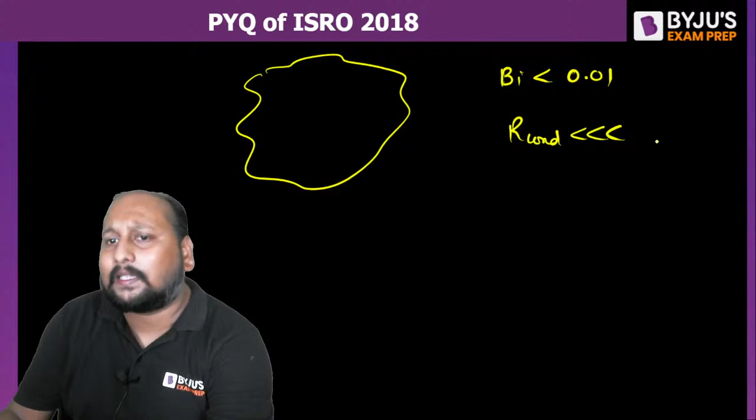If the body has a Biot number less than 0.01, that means the conductive resistance is very, very less, right? That simply means the temperature gradient on the surface is negligible. This is exactly the Biot number, this is exactly the concept of lumped body, right?

Okay fine, and because in Biot number the denominator is the conductive ratio, it has to be less. Either convective is very high or conductive is very less. That is the reason the Biot number has a very small value.

Option C will not be correct. Look, if conductive ratio is less, the Biot number will be increasing. What is the question? The value of Biot number is very small - what is the reason for that? What is the reason that Biot number is very small? Option B is the correct answer.

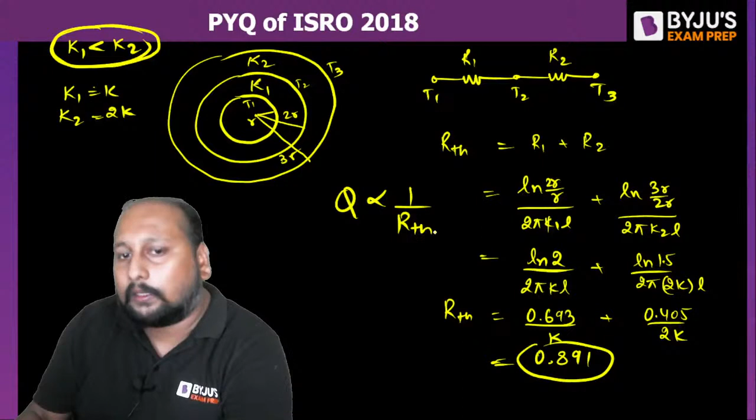In the first case, RTH is more, and we know that the heat transfer is inversely proportional to the resistance. It's a steam pipe, we always need to reduce the rate of heat transfer. So जिसका thermal resistance ज़्यादा होगा, that's the best configuration. That means I need to keep the inner side lower thermal conductivity and outer side higher thermal conductivity. In the examination, you won't be doing this activity; ये only for you guys to understand this logic. In order to increase the resistance, we always keep the material having lower thermal conductivity on the inner side and higher thermal conductivity on the outer side. Is this clear?

Fine. Next question, very easy question. The critical radius of insulation for a spherical shell. Remember, spherical shell, they are talking about the critical radius.

Critical radius, that too I'm talking about sphere. What is the formulation? 2 into thermal conductivity of the insulating material divided by the heat transfer coefficient of the outer surface. भाई 2K by H होता है. The critical radius for sphere is 2K by H.

Cylinder के लिए क्या होता है? For wire we are having K by H. So option B is the correct answer. इसमें तो hardly 1 second will be taking. ये सब जो question है ESE में आ चुका है, GATE में आ चुका है. These questions are being repeatedly asked. So as it is, same question is being asked.

Okay, 2K by H. If I say K by H, this formulation is for wire or cylinder, right? ये सिलेंडर के लिए होता है. फाइन, चलिए बहुत बढ़िया. नेक्स्ट क्वेश्चन.

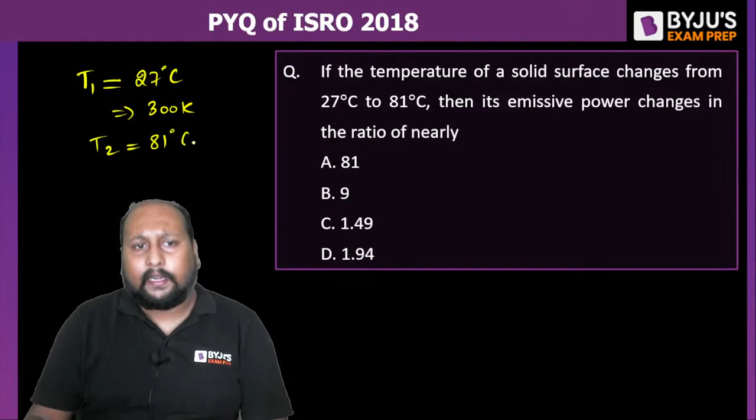If the temperature of the solid surface changes from 27 to 81 degrees Celsius, then its emissive power changes in the ratio of nearly 81, 1.49, 1.94. Simple question hai, quickly tell me what's the answer. Let's say T1 is equal to 27 degrees Celsius, that is 300 Kelvin. T2 is equal to 81 degrees Celsius plus 273, we will be having 354 Kelvin.

We know that the emissive power is directly proportional to T to the power 4. So E2 by E1 is equal to T2 by T1 to the power 4, right? So this is 354 by 300 to the power 4. 1 point something, ये नहीं हो सकता, 1.9 something होना चाहिए, और 1.5. Please check what is the answer we're getting. By calculation करना है, that's it. Are we getting 1.94 or 1.49?

Option D, very good. It will be approximately 1.936, इस range में आएगा. So we can say 1.94 is the correct answer. हाँ, चलो 1398. Okay, 8 है. Fine, 1.94. These type of questions, it's like 10 seconds. थोड़ा calculation है, 10 second बोल लेते हैं. Theoretical question hardly 5 seconds.

So there will be many questions which will be time taking. ठीक है, तो कुछ question ऐसे भी होंगे where you can save the time. So always remember, it's all about time management. भाई पेपर 1 घंटे का है, अच्छे खासे क्वेश्चन करने पड़ेंगे. Do not try to give more than 2 minutes to a single problem. इससे ज्यादा नहीं देना, चाहे कितना भी आसान हो या डिफिकल्ट हो. Okay. हाँ, definitely. Yes.

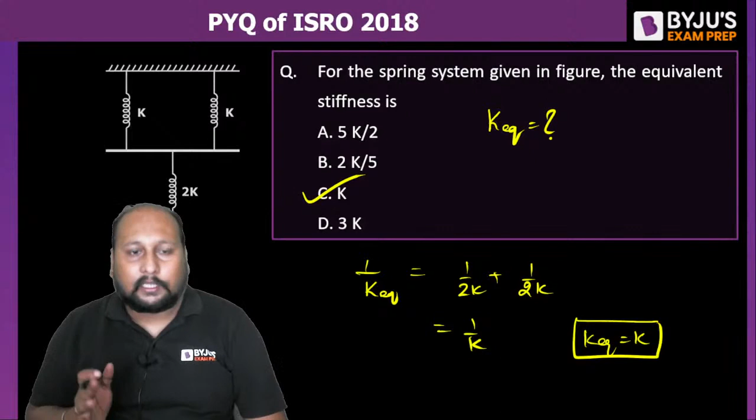इसमें तो no need to do any calculation. अच्छा, you're not able to see the diagram. देखो ऊपर 2k parallel में and series with the 2k. ठीक है, option C. Very good, Surya. Next question on the screen.

For a mechanics subject, there are two blocks A and B of 1 kg each kept on a flat surface, one above another. The coefficient of friction between the contacting pairs is 0.2. That means mu for all the surfaces is 0.2. If the lower block is pulled with a horizontal force F, the minimum value of F for which slip occurs between the blocks is nearly?

You have to tell me the minimum force I need to apply on block B such that there will be slipping between A and B. Quickly, 5.9, 4.9, draw the free body diagram. Individual blocks के लिए draw the FBD and do the analysis. I think that will be easy for you guys to understand. चलो चलो जल्दी से.

If I talk about the free body diagram of block B, we are having a force F, right? There's friction on surface 1, F1, and on surface 2, F2. We'll be having normal reaction N2, normal reaction N1, and weight WB, right? Okay, fine. So now for static condition,

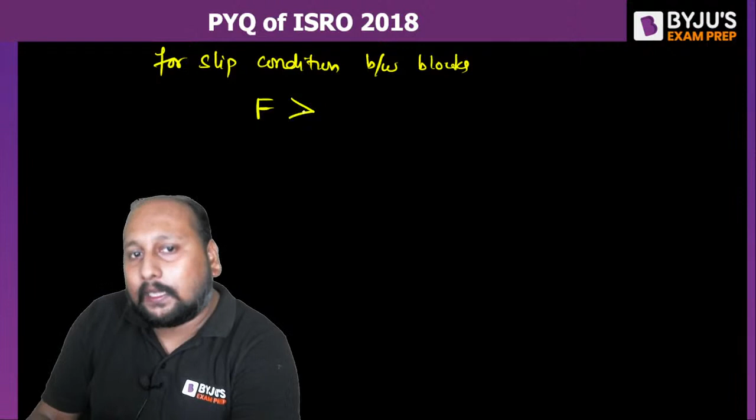Now for the slip condition between the blocks, I need to apply a force greater than the total summation of the friction, then only slipping will happen. अगर आप नीचे वाले block को pull more than the static force required, only then there will be slipping between A and B. So for slipping, F should be more than F1 plus F2, so F should be greater than mu 3g.

What is the value of mu? Mu is 0.2. 0.2 into 3 into, take g as approximately 10 for easy calculation. So 6 something will be the answer. So F greater than 6. अच्छा, 9.81 लेते हैं for exact calculation. What's the value you are getting if you take 9.81? Quickly.

Yes, 5.9 I think, right? 5.91 something, right? So 5.9. So that means if your force is more than 5.9, then only slipping happens, so we can say the minimum value is 5.9. Option A will be your final correct answer. Yes,

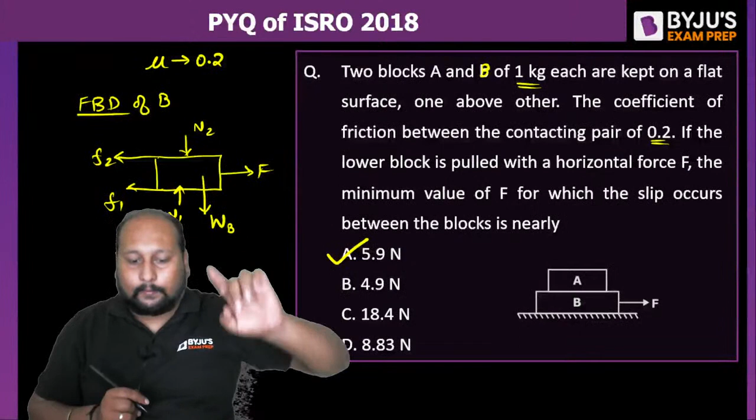5.886. So it came out more than that, right, because your force should be more than; let's take the exact value, 5.886. If you are applying a force more than 5.886, the body will be having slipping. So minimum value will be 5.9 Newton. Option A is the correct answer. Is this clear? Okay. Can we proceed to the next problem?

Yes, in short, exactly. Fine. Look, there's nothing to it. For static condition, whatever force you are applying, for the limiting case, the summation of friction forces F1 and F2 should be equal to F. And if you are applying a force more than this, the summation of F1 and F2, that will be going for the dynamic condition, right?

You might have seen there's a graph between the friction and the applied force. Gradually the applied force is equal to the friction force. There will be a point, the limiting force. And after that, however much force you apply when the body is in dynamic condition, the friction force will be constant. In that case, slipping will always be happening. Is this clear? Simple logic here.

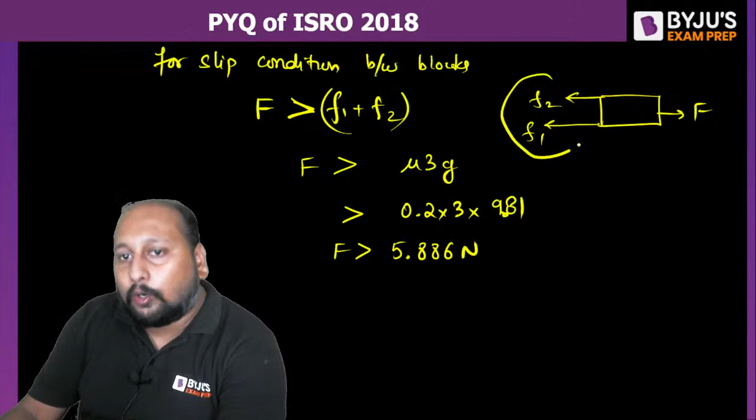If this is a block, I'm applying some amount of force, but due to some friction, it is not moving. This is a constant force and a constant friction force is being applied, but the total net force is equal to 0, right? So the same logic is applied here. On block B, the total friction, that is your F2 and F1, right? This is your F. So if you apply a force more than that of the static friction, the body will be in the moving condition. Okay, clear? Can we proceed? Next question. If there is any doubt, please do let me know. All good, all clear.

Fine. Next question on the screen: if the natural frequency of a spring mass system on Earth's surface is F, its natural frequency on the moon, where acceleration due to gravity is 1/6 that of the Earth, what will be the value of the natural frequency on the moon? A simple question. This type of question you might have solved n number of times. Option A, option B, option C, or option D.

On the Earth surface, we are having F. What will be the natural frequency on the moon where acceleration due to gravity is 1/6 that of the Earth? That means on the moon, the g value is 1/6 of Earth's. Okay. Option A, option B, option C, or option D. Mass won't change. Okay. Anyone else? Yes.

Simple question. Its natural frequency on the moon where acceleration due to gravity is 1/6 of that of the Earth. Okay. Under root K by M, that's what you're saying. Omega is equal to under root of K by M. Mass is not changing. Mass is an inherent property. Stiffness is an inherent property. So can we say the natural frequency of vibration won't be changing?

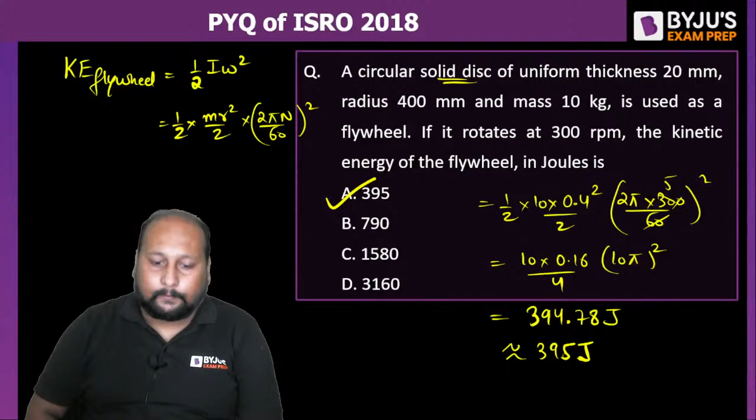So if you calculate, I think you should be getting somewhere around 394.78, round off to 395 joule. Option A is the correct answer. Is this clear? Very good, Rohit, everyone. Okay, 0.04 into 10 to 0.4, 10 pi square, 100 pi square, 395 something. Option A. Very good, Rohit, Pagal, Vinay, John, Ashish, everyone got the answer? Yes. Chale, next question on the screen.

If the length of the cantilever beam is reduced to 1/4, we are reducing the length by 1/4 of the value. The natural frequency of the mass at the end of the cantilever beam. So there is a cantilever beam. We are having a mass m being attached at the end of the beam of negligible mass will be increased by a factor of 2, root 8, 4 or 8. Question is very easy.

What will happen if I try to decrease the length by 1/4 the time? What will be the impact on the natural frequency of vibration? Let's say in radian per second, omega 2. Quickly. Option A, option B, option C or option D.

So we know that in a cantilever beam, if you're applying a load mg at the end, what is the static deflection? What is the value of delta? Anyone? It is equal to mg L cube by 3EI. So we can say omega n is equal to under root of g by delta. So omega n is inversely proportional to root delta, that is equal to 1 upon L to the power 3 by 2. Okay, so we are decreasing the length, that means omega 2 by omega 1 is equal to L2 by L1 to the power 3 by 2.

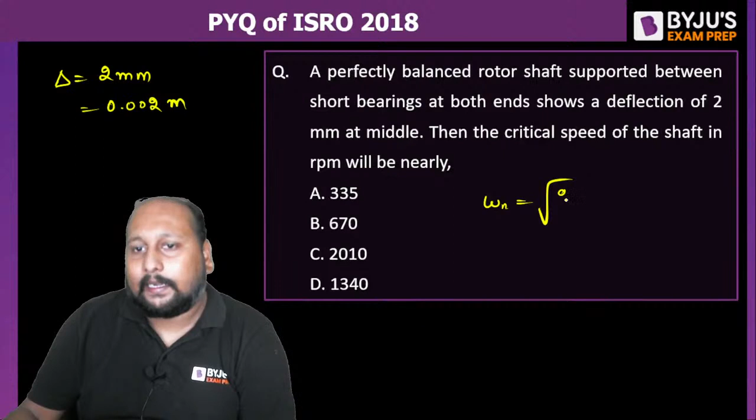9.81 divided by 0.002, root of this. So 9.81 into 10 to the power 3 by 2, root of this. What's the value you're having? 70 point something... 70.8 radian per second, is that right? Oh, 70.035, not 70.8.

70.035, right? But they're asking the answer in RPM, so you have to convert. So RPM is equal to 70.035 into 60 divided by 2 pi. Near about how much is it coming? 335... okay, 335, 670, 2000, and 1300.

So it is approximately 668.79 RPM is the final answer. Option B will be your final correct answer. 670 RPM, option B.

So I think you all have solved a very interesting question. The question level is very basic. If you have studied, if you have given your best in GATE examination, let us suppose you are not able to get a good rank, but at least you have studied throughout the year, I think you can implement that concept clarity in ISRO and get into ISRO. Let us suppose your dream is something else, but for the time being you can get into ISRO. You can prepare more if you want to crack some other PSU. But for the safer side, do get into this golden opportunity for all the mechanical aspirants.

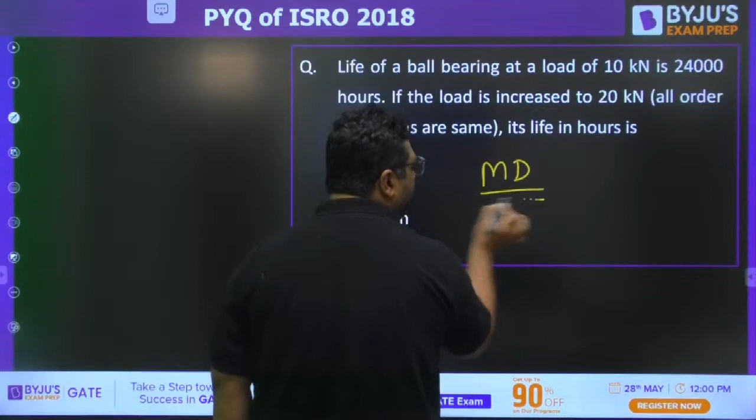Now we are starting with the question, aspirants. This is the first question from machine design, and I feel by looking into that you can tell it is a question from ball bearing. What the question is saying: life of a ball bearing at a load of 10 kilonewton is 24,000 hours. So they have given life as 24,000 hours, and this is corresponding to a load of 10 kilonewton. Then they are saying the load is going to be increased to 20 kilonewton. By how much will the life get reduced? So guys, you are already aware that P is the load and L is the life.

So P, L10, 1 by K is equals to constant, which we generally write. C is the load carrying capacity, or C is the dynamic catalog rating. So you can say P1 L10(1) raised to 1 by K is equals to P2 L10(2) raised to 1 by K. I feel you are aware of the value of K. They are saying it is a ball bearing, so for ball bearing, what is the value of K? It is 3.

I feel you are aware that when you write L10, you will be writing life in hours into 60. This will make it minute into RPM divided by 10 to the power 6. But if you see in the entire question, they have not mentioned any speed. Why? It means both the time and speed are going to be same, so n60 and 10 to the power 6 are going to be cancelled out.

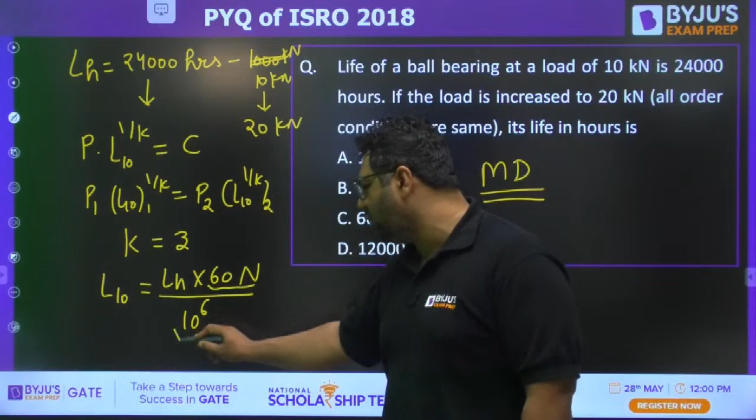So you can directly put the value: 10 into what is L10, 24,000 to the power 1 by 3 is equals to 20. Here you need to find out the hours, you can directly get. Tell me what will be the right answer for this question.

So guys, if you see the previous paper which we discussed of ISRO 2020, you will get a very important point that in this paper questions were very easy. In the 2020 paper, a lot of numericals we did for production. Here only 2 to 3 numericals, rest all are theory questions.

Okay, Pagelword and Vinay are saying the answer to be A, and guys I would like to say your answer is correct. 1000 hours is the correct answer, so you will be getting LH2 to be 1000 hours. So guys, only 2 to 3 numericals are there, rest are very easy questions, they are not difficult.

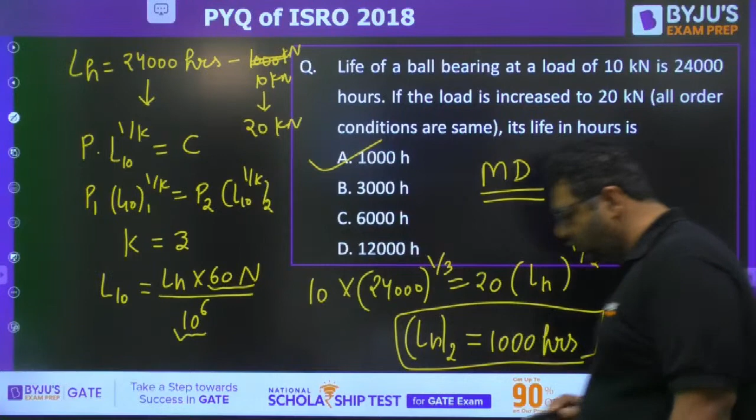So we are moving further guys to the other things. I feel I have given you the concept of how to do this and everybody can do it very easily. So moving further guys, moving to the next question.

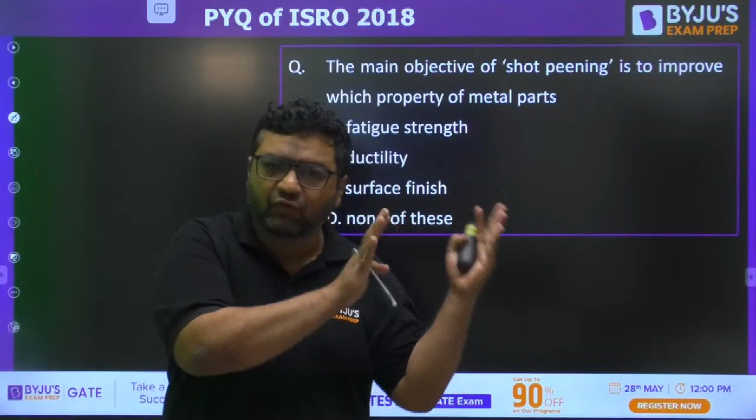Now my dear, there are some questions from material science. One observation is common: that from material science, always the questions are more in number. If you compare entire production with material science, the questions of material science are more than the number of questions asked in entire production. So that is why material science is becoming very, very important.

This question has been asked at least 3 times in ISRO: by doing shot peening, which property is going to get improved? I feel everybody knows what is shot peening - making steel balls and hitting on the surface to increase what? Fatigue strength - very good, everybody has given the right answer. So this question has been repeated 3 times.

Moving to the next question guys, everybody of you have given the right answer. This is from metrology. If you see metrology and inspection, more questions have been seen in ISRO than GATE. So ISRO asks more questions from metrology and inspection than GATE, but they ask lesser questions from the metal cutting or machining part. Last time only 2 questions were there, this time also only 1 to 2 questions are there from metal cutting. But from metrology and inspection, they are asking 2 to 3 questions.

So they are giving more weightage to material science and metrology inspection. For other topics, they are asking very similar numbers, like 1 question from welding, maybe 1 question from casting, maybe 1 question from metal forming, like that only. But major weightage is given to material science.

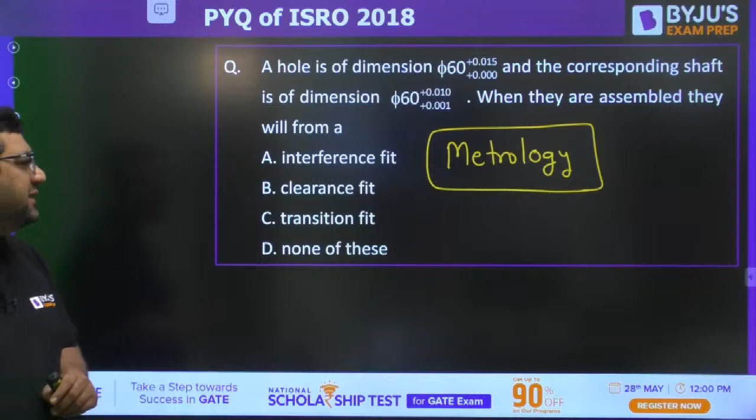First of all, we will make the basic size of 60, and you can see it is plus to plus 0.015, so this is going to be the size of hole - this is the hole, and here the size is 60.015. And if you talk about the corresponding shaft, you can see the shaft size is coming like this: 60.001 to 60.010.

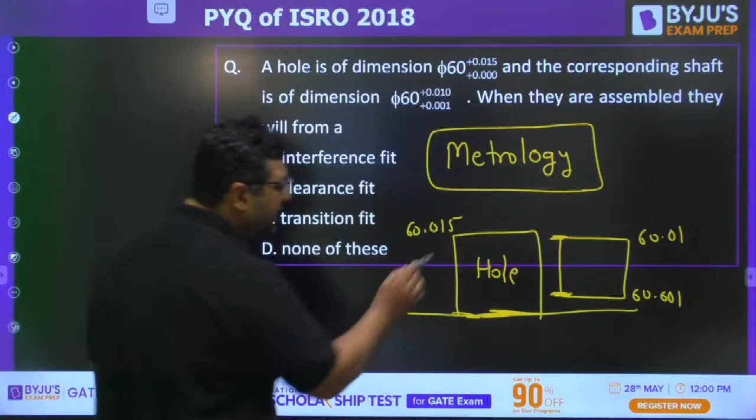So you can see here the minimum size of shaft and maximum size of shaft, both are more than the minimum size of hole. So you can say this is going to give you interference fit, because when hole size will be bigger than the shaft size, you will get clearance fit. Actually if you see this, where both things are feasible, you will be getting transition fit here. I feel everybody is clear - yes, very good.

Moving to this question, once again material science and welding combination - material science and welding combination, tell me that.

Which of the following carbon steels is most weldable? Okay, aspirants have said D. What about others?

So guys, I already told you that whenever we are going to see the weldability, weldability is inversely proportional to the percentage of carbon content. As the carbon content increases, weldability gets reduced. So by looking into that, you can answer very easily. What will be the answer?

Actually 0.15 and 0.3 both are low carbon steel. So no doubt, when comparing low carbon steel, medium carbon steel, high carbon steel, we say low carbon steels have more weldability. But here both grades are from low carbon steel. Then what will be the answer?

Very good, Vinay. Vinay said D. Pejal word, do you want to change the answer? I want the correct answer from all of you.

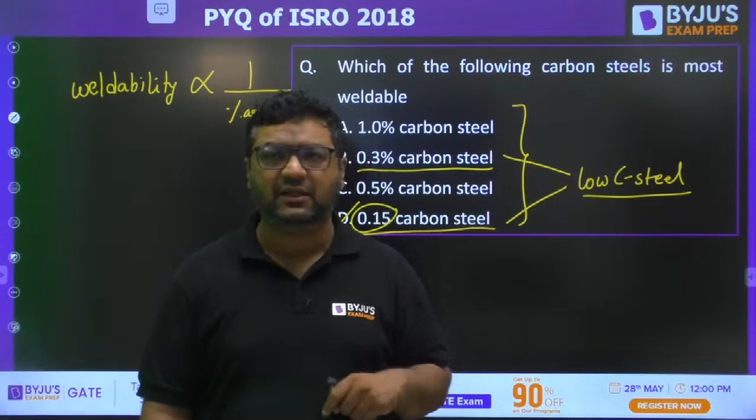Dear, here also percentage will come. Everywhere percentage is there. This is a misprint. Is it clear now, aspirant? Otherwise, what is the meaning of 0.15 carbon steel? Is it clear now? Yes, if percentage is not there, then you can say that. That's fine.

Here also percentage is there, just look at it. Here also I have made it percentage. Now tell me which one is lesser. 0.15 is lesser than 1. Okay, fine, moving to the next question.

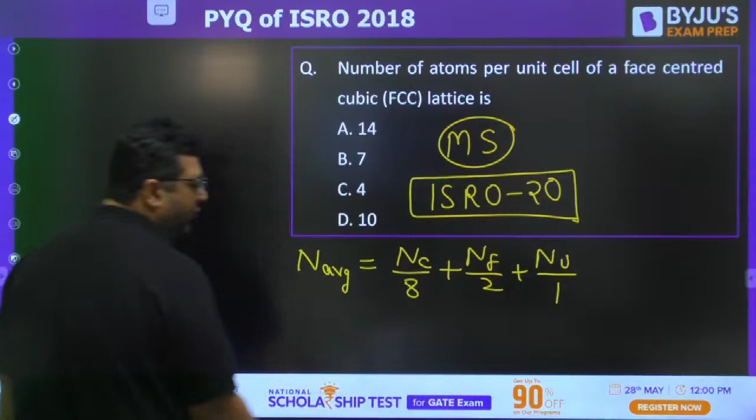So the answer for this, you know that when we are going to find out the average number of atoms, we say number of corner atoms divided by 8, number of face center atoms divided by 2, number of body center atoms divided by 1. This is the formula for cubic. You know, for FCC, we have 8 corner atoms, 6 face center atoms, 0 body center atoms. So the answer is going to be 4 for this, and the answer is C for this. Very good Arnab, very good aspirant.

Moving further, the impact strength of a material is an index of its... This is once again from the properties. You can call this from material science as well as SOM, because in both subjects we discuss the stress-strain diagram and these properties. Very good. Just by looking at it, you are able to answer. That's what I want to say.

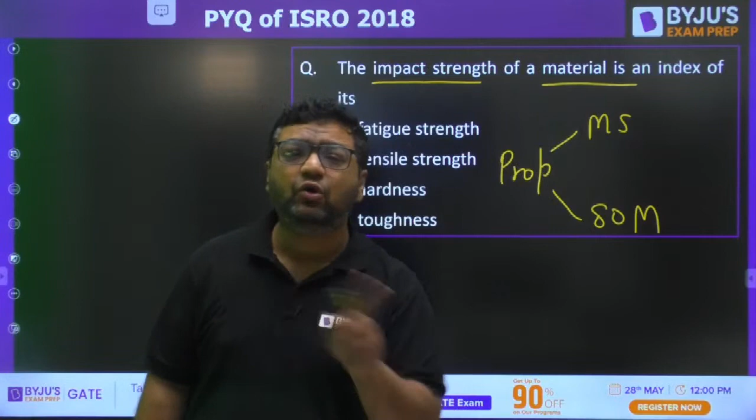The majority of questions in ISRO are going to be like this. So whenever you start solving the paper, in the first attempt, your target should be to solve these types of questions where you need not do any calculations. After that, move to the second round and go for the numericals part. The answer for this is toughness, because we already know that impact is related to toughness. Okay, very good Sai Teja.

Moving to the next question, guys. Now this is once again from material science. They are asking: iron, nickel, titanium follow which crystal structure? Very good Arnab. You have options: BCC, HCP, FCC; FCC, BCC, HCP; HCP, FCC, BCC; BCC, FCC, HCP, and they have clearly mentioned room temperature. Why are they clearly mentioning room temperature?

Because iron shows two crystal structures. Iron shows both BCC and FCC, but FCC is shown only in the range 910 to 1450 degrees Celsius. In all other ranges it is going to be BCC. So at room temperature it is going to be BCC. So first of all, B and C cannot be correct. So either A or D will be the right answer. Now Pejal word is saying A.

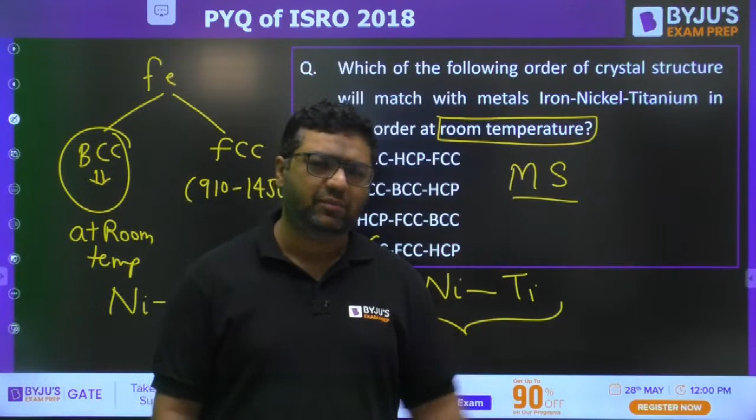So here the problem is, if you are not aware of each element, you will give the wrong answer. Nickel is found to be FCC. BCC, FCC, HCP. Titanium is HCP. So the answer for this is going to be D. I feel Arnab, you are moving one question before. So try to come live. D will be the right answer for this question.

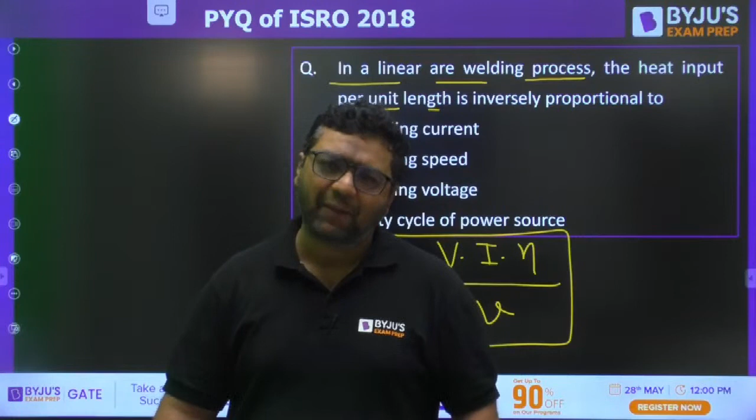Okay? Vinay is saying the answer would be B for this, and yes, it is correct. B is the right answer: welding speed, because all other things are directly proportional. Very good. Moving further.

This is once again from the welding. It is a very easy question. The welding process which uses a blanket of fusible granular flux: submerged, tungsten, electroslag or thermite welding. Very good. Wonderful, guys. So the answer for this is going to be nothing but submerged arc welding.

So have you seen the time from when I started the question, how easy the questions are? In the 2020 paper, questions were difficult. But it will be difficult for everyone. Okay, so don't worry about that.

So when we are talking about submerged arc welding, you know that there we are using the wire electrode, and you are going to provide a flux drum. Because of that, molten flux will be making a layer, and in that layer only the welding is going to take place. That's why we are saying it as blanket of fusible granular flux. Very good, Rohit. Sorry, Rohit, in inert gas we are not using flux. In TIG we are using inert gas. Okay.

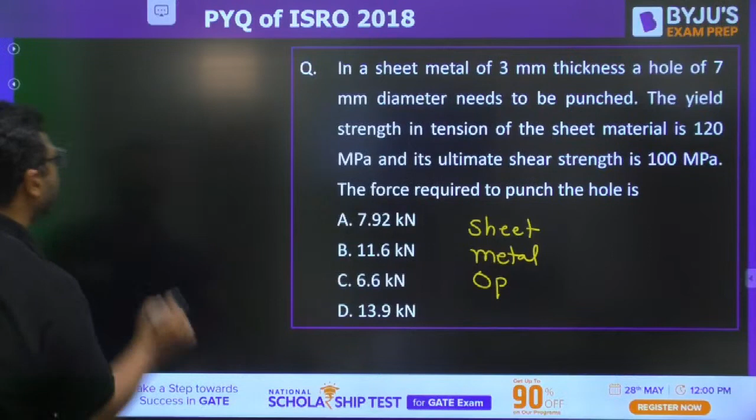Very good. Next question. This is from sheet metal operation. So I feel you are aware of the punching force required. That is pi d t into tau ultimate. Shear stress into shear area. So you need to solve this question. Okay, Arnab, I have given the answer.

6.6, C. Let me check. Yes, anybody else who has done it? Exam Chunk is saying A will be the answer. So I would like to say C is the right answer. 6.6 kilonewton. Pi, thickness is 3, diameter is 7, into the ultimate shear strength.

Shear strength will be used, no? You have used the normal stress instead of tau ultimate. When you do this with shear strength, you will get 6.6 kilonewton. If you use 120, then you will get 7.92. But that is wrong, because ultimate shear stress is used.

Okay. Moving further, guys. Profile of gear tooth can be checked by, once again, inspection devices. For such questions, unlimited knowledge is there. So I would suggest for these kinds of things, you need not go for the books. When you go for PYQs, they are going to be repeated questions. Very good, Aspirant, Exam Chunk. The answer is optical projector. So profile of gear tooth can be checked by optical projector. Very good. Correct. Moving further.

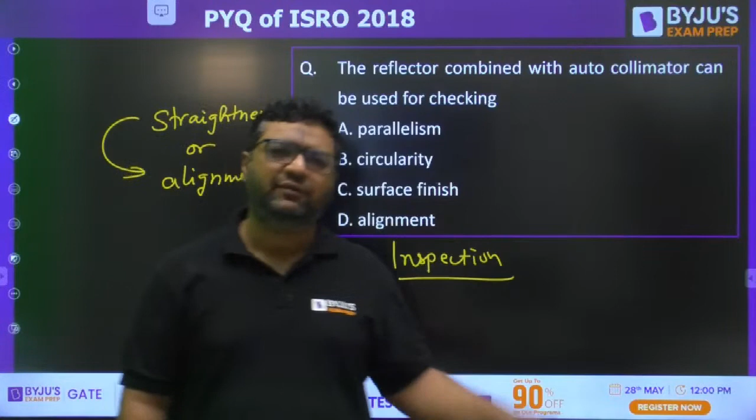I would like to say this is used to check straightness, which is very much near to alignment. Okay, straightness. For measuring the straightness, we are using this. So that's why the nearest answer should be alignment, because straightness is not there. Is it clear? Everybody got it? Yes. Moving to the next question, guys.

Next question is very easy. They are asking you about amorphous material. Which of the following is amorphous? Mica, lead, rubber or glass? Once again, material science. Yes. So guys, glass is the answer. Aspirant, why are you saying C? Glass is a brittle material. I feel everybody knows that. Yes, aspirant, is it clear?

So guys, we will be coming up with more PYQs as well. Okay. Yes. So moving further, guys. This is once again from strength of material, torsion.

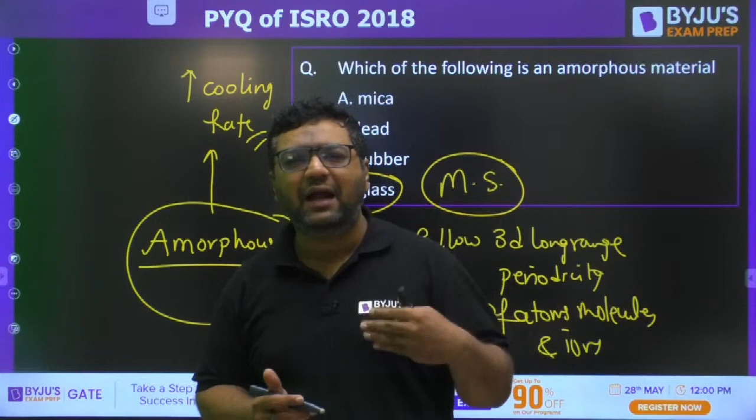So when they will not be getting time to be aligned, definitely what will happen? Just imagine a case where a lot of people are going somewhere. Like at religious places, many times when there are a lot of people, what happens? A stampede happens, just because of the hurry.

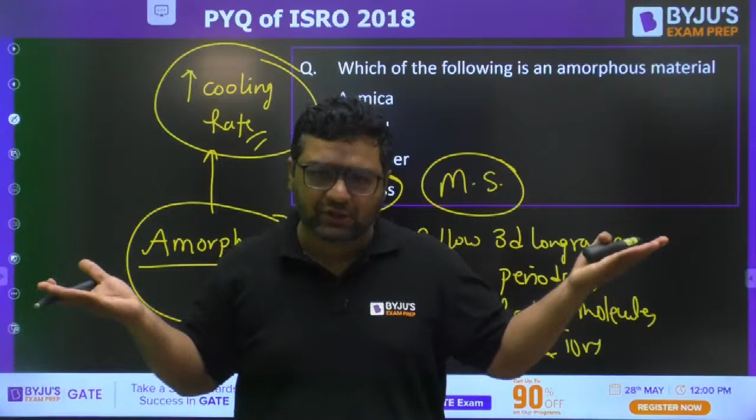So whenever you provide less time for solidification, in a hurry, they will have random movement. At some places more atoms will be there, at some places very few atoms. Because of that, you will not get 3D long range periodicity. So it will become amorphous. So metallic glass is an example. Metals can also be like glass.

Okay? Aspirant, like quenching. Moving further, guys, amorphous is even worse than the quenching part. Because in quenching you are going to get hard and brittle structures, but amorphous is much worse than that.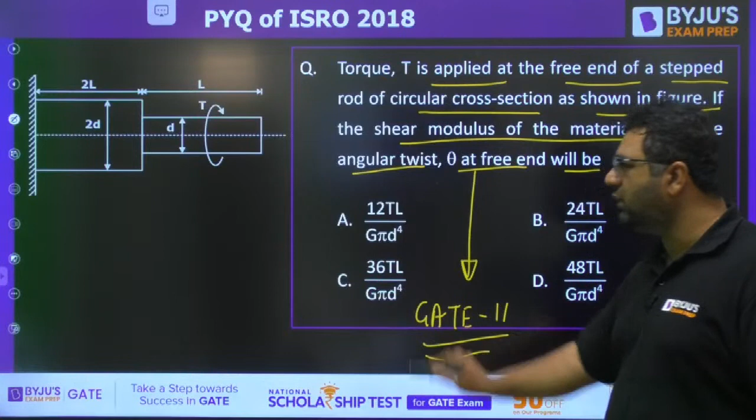Okay. So torque T is applied at the free end of the stepped rod of circular cross section as shown in the figure. If the shear modulus of the material is G, then the angular twist theta at the free end will be? This is a very easy question. This type of question was asked in the GATE paper in 2011 as well. Try to solve it.

Okay, exam chunk is saying the answer is C. What about others? I feel this is shafts in series. You call this 1, you call this 2. Then theta free is theta 1 plus theta 2. You know both have the same torque, so it is T. Length of the first is 2L

upon G pi by 32 (2D) to the power 4, plus T into L upon G pi by 32 D to the power 4. So here 2 to the power 4 is 16. This will give you 2. 2 into 2 is 4. This is 32. So you will get 4TL by pi G D^4 plus 32TL by pi G D^4.

Yes. Very good. So are we getting C? Everybody is getting C. Please tell me, Pagel word, exam chunk, aspirant. Yes, very good. Moving further, guys.

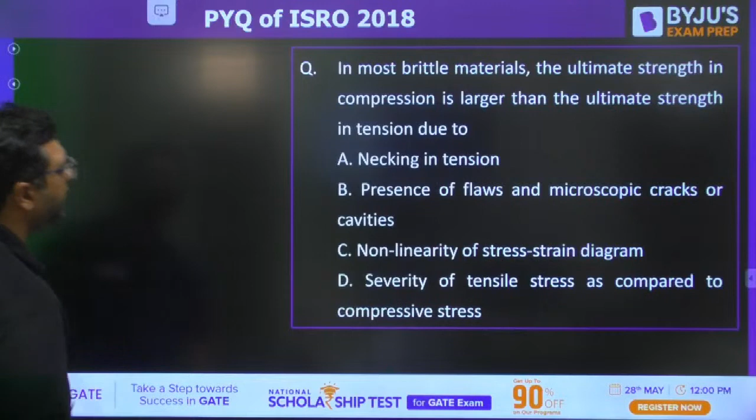This is once again from strength of materials. In most brittle materials, the ultimate strength in compression is larger than the ultimate strength in tension. They are saying that SUC is more than SUT. And the reason for that is: necking in tension, presence of flaws and microscopic cracks or cavities, non-linearity of the stress strain diagram, or severity of tensile stress compared to compressive stress.

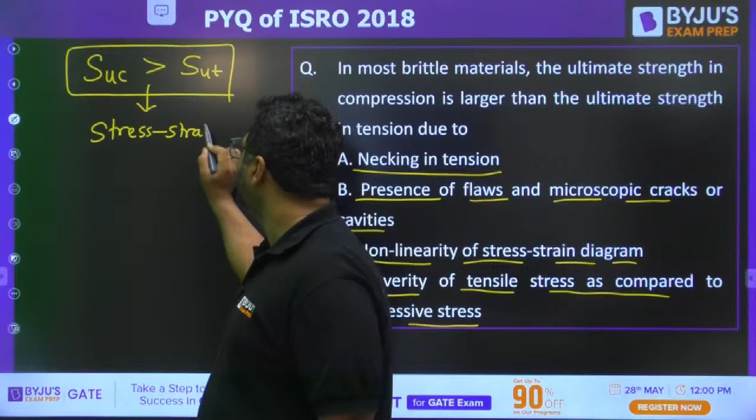What is the reason behind that? This is a very good question from the stress strain diagram. And every time I explain the stress strain diagram, students ask this question. Exam chunk is saying the answer is B. Anybody else? Yes, the answer is correct.

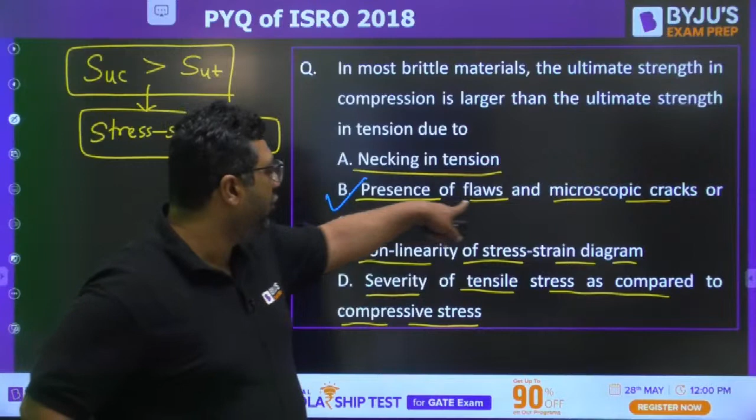Because my dear, every material has some flaws, some microscopic cracks. Whenever we provide compression, these cracks are suppressed, compressed. And if you have a material with a crack like this, when you apply tensile forces onto it, this crack is going to expand like this, which then converts into the necking region. But when you apply compression, it is going to be suppressed.

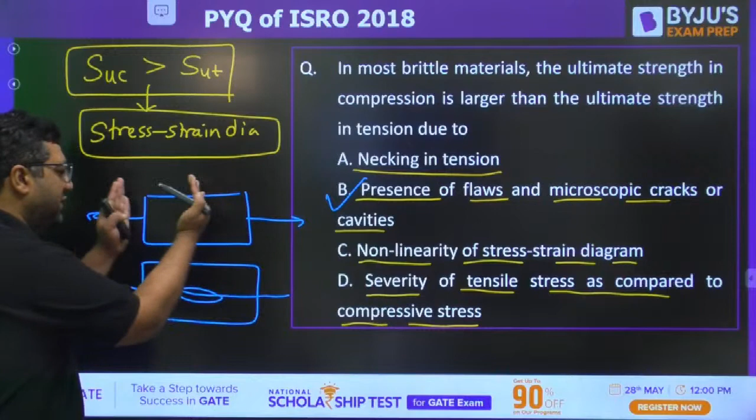So because of these things, whenever they are present, they affect tension badly and compression less. So the answer is going to be B. So please tell me, Vinay and Aspirant, did you understand or not? Don't worry. Obviously, if you knew everything, why would you be in this session? So you are going to learn something. Is it clear for everyone?

Yes, very good. Moving further, guys. This question I feel Suraj sir has already covered. Now the next question is from SOM. Taper bar.

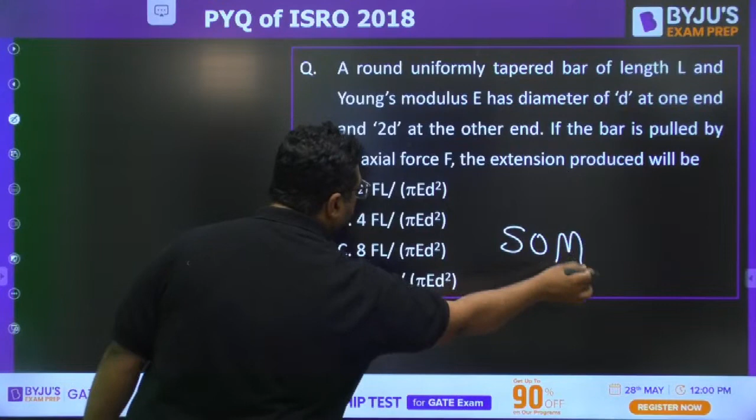This is a taper bar. Then, my dear, you can see one more thing: here the diameter is D, here the diameter is 2D. And we are applying a force P here, a force P here. P is given as F. And they are asking you the delta. I feel you are aware that it is 4PL upon pi E D1 D2. So just put the value and get the answer. 4PL upon pi E D1 D2.

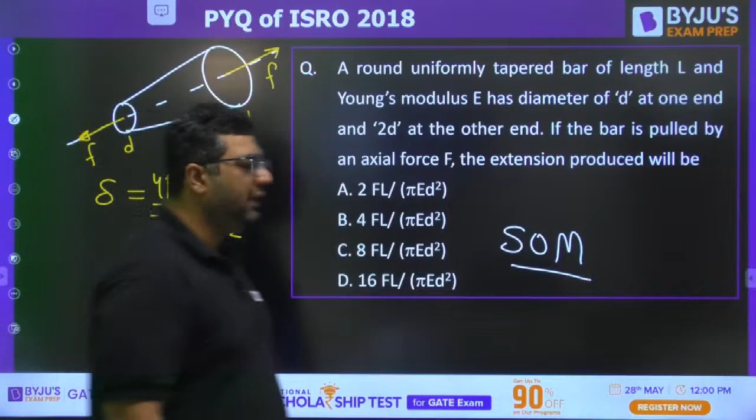Sai Teja is saying the answer to be B. Okay. Okay, A. A is the right answer. Sai Teja, when you put D1, D2, D2 is 2D, na? So what will you get? 4FL upon pi E D into 2D. So this 2 will get cancelled out. This kind of mistake we make in a hurry. So just avoid it, okay? Answer will be A for this. Moving further, guys.

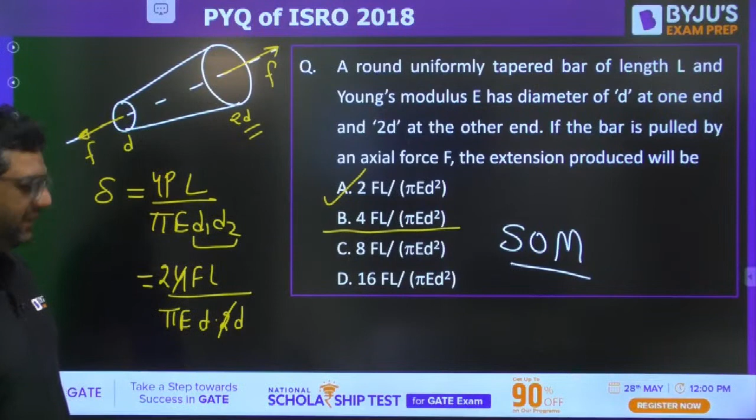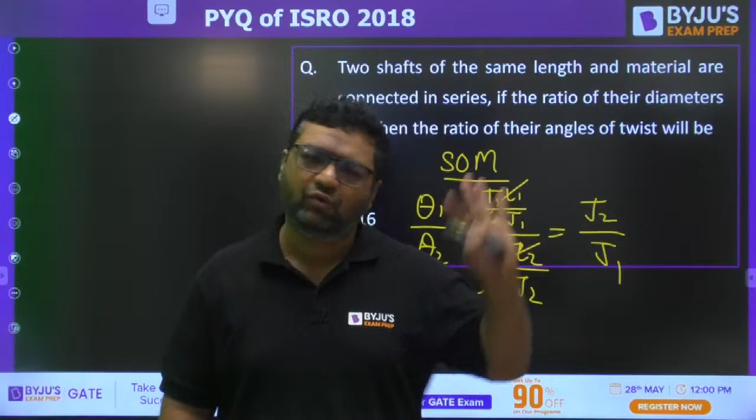Hi aspirant. In general, they are not allowing the calculator. But don't worry, I will be coming up with separate sessions on this, like how ISRO 2023 will be different. Actually, they already gave the posts last year for GATE 2021-2022 candidates. They already gave the vacancies, and there they considered the age. Although they were very few, they gave that notification before. This time the notification is for 23. For 21 and 22, they already gave it last year, but it was from GATE, not from a separate exam.

Okay, what will be the answer for this? Concentrate on the question as well, guys. Baaton mein lag gaye sabhi. What will be the answer? Then after me, Chandra sir will be coming for other questions.

Okay, the answer for this will be J2 by J1. So it is D2 to the power 4 by D1 to the power 4. They are saying the diameters are in the ratio of 2. Yes, aspirant. Tell me the answer.

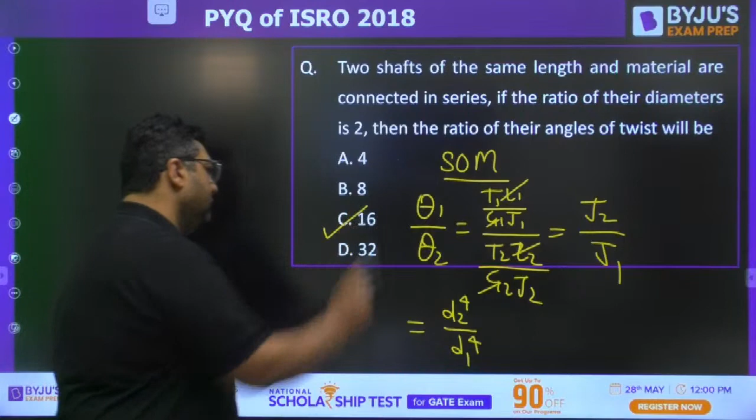Aspirant, Rohit. Yes, 16 is the right answer. Moving further then.

Rohit, Arnab. This is once again from strength of material. You need to find out the maximum bending moment at C. So I feel everybody knows that if this force is given, we can find out the support reactions first. RA will be F into 2L by 3 by L. So it is 2F by 3. And this is F by 3.

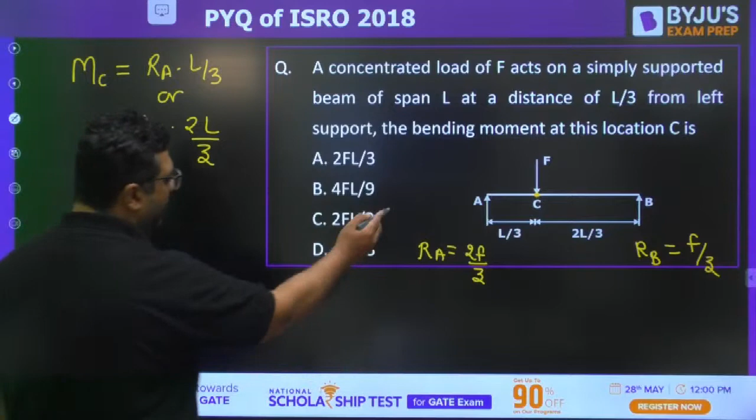They are asking you the maximum bending moment. I feel you can do it very easily. What will be the answer for this? Oh, very good, Rohit. They are asking you the bending moment at C. You can write it as RA into L by 3 or RB into 2L by 3. Both ways you will get the right answer. It will be 2FL by 9. Okay, so C is going to be the right answer.

Next question, guys, is once again from strength of material, self weight. You can see they are asking a direct formula. A solid metal bar of uniform diameter D, length L, placed vertically, if rho is the density, E is the Young's modulus, then the total elongation due to self weight is. You need to tell the total elongation by self weight.

What will be the answer? Pagel word is saying B will be the right answer. What about others? So yes, the answer will be rho g L square upon 2E. I also told you delta is directly proportional to L square, not at all a function of area or diameter. Okay, very good.

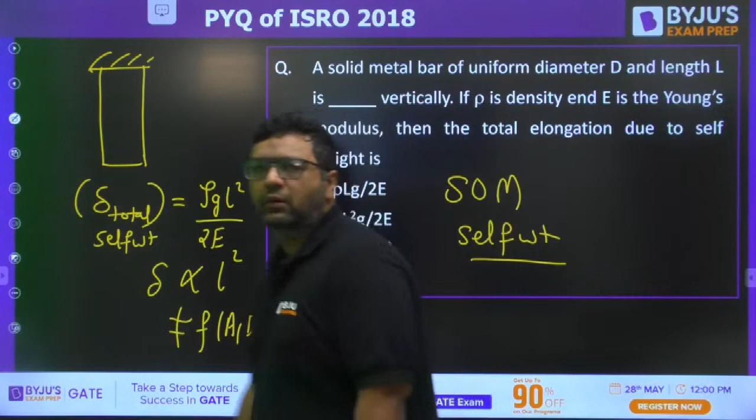Moving further. If the length of cantilever beam is reduced to 1/4, the natural frequency... I feel this question has been covered by Suraj sir because it is from theory of machines. Have you done it? Very good, Arnab. Pagel word, very good. Have you done it now? Shall I skip it? The answer will be D for it or B for it.

So the length of cantilever beam is reduced to 1/4, the natural frequency of the mass M at the end. If we have a force P here, then deflection is PL cube upon 3EI and natural frequency is root of g by delta. So omega n is inversely proportional to root delta. When you put the value of delta, it is PL cube upon 3EI. So omega n is inversely proportional to root L cube. Yes, the answer will be B for this.

Okay? Yes. Very good. Is it clear? Square root of 8. Okay, no square root of 8. It is 1/4, no? So it will be 1/4. Yes, square root of 8 is correct only. 4 to the power 3 by 2. 8, yes, 8 will be the right answer. Sorry. 8 is the right answer.

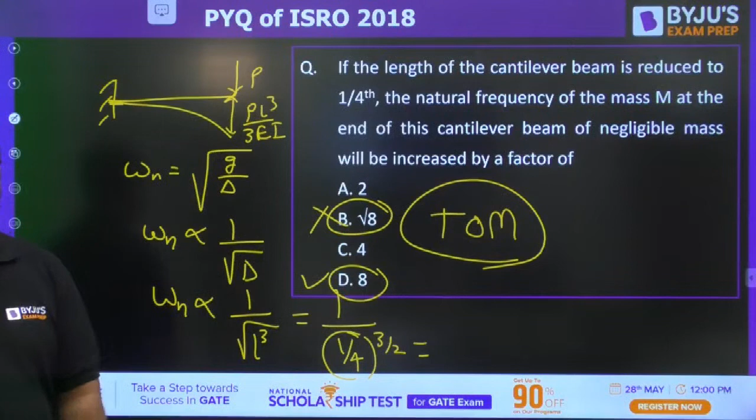Moving further, this is a question from ISRO. It is a repeated question of ESE, already asked in the engineering services exam. I feel you are aware of the relation that E equals 9KG by 3K plus G. When you cross multiply and divide it by E, K and G, you will get the right answer. The previous question you have already done in theory of machines. That's why.

Yes, what will be the right answer? Pagel word is saying D. It is not MSQ that you are saying A or D. So you can write 3K plus G into E equals 9KG. So 3KE plus GE equals 9KG, divided by EKG. So KG cancels out, G cancels out, KE cancels out. So 3 by G. D is the right answer.

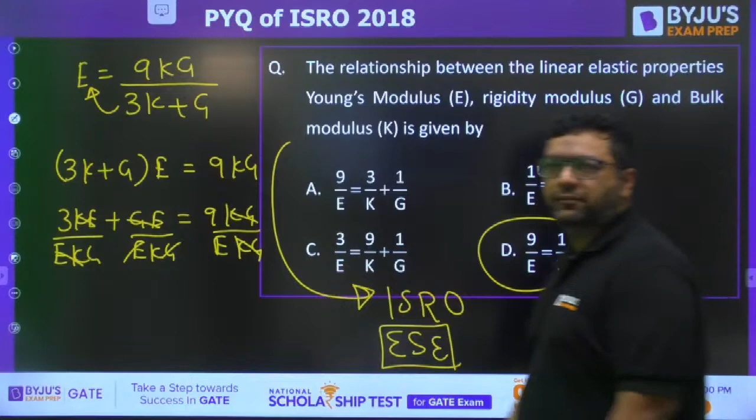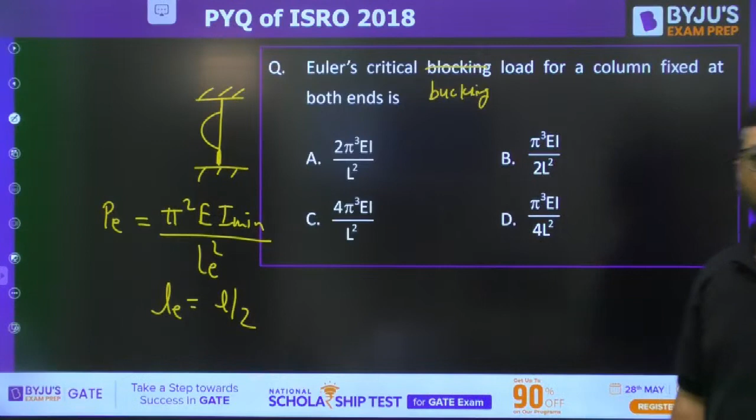Moving further, guys. This is once again strength of material. Euler's critical buckling load, fixed both ends. I feel you are aware that buckling load is pi square EI minimum upon LE square. Here LE will be L by 2 because that much length is affected by buckling. Very good Arnab, very nice. I am helping you so that we do it in less time, otherwise I could give you time first to solve. Okay, C is going to be the right answer.

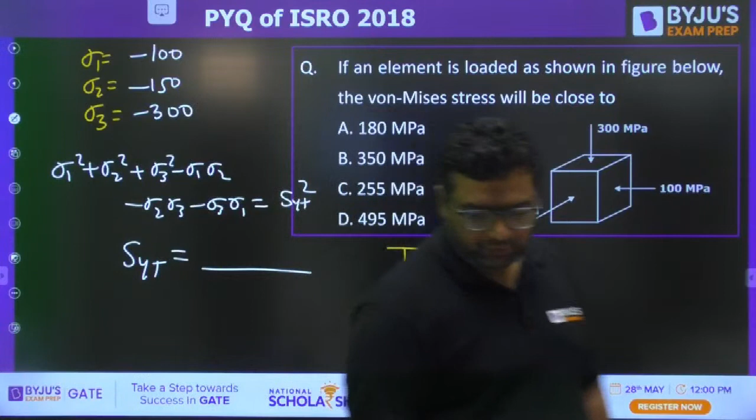Go for it. Wonderful, guys, we are about to complete. Now Chandra sir would be joining us. Okay.

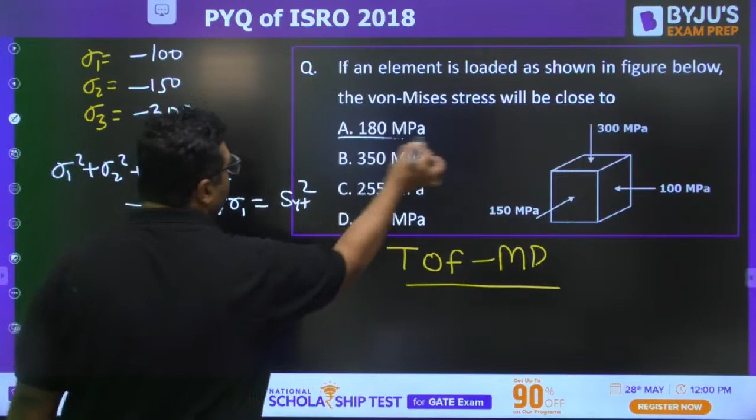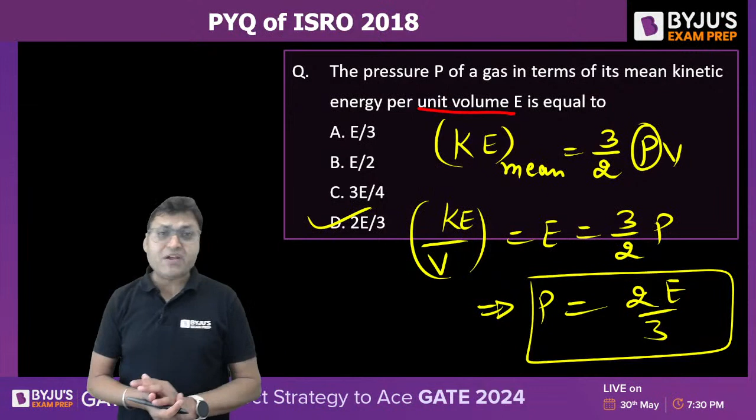Very nice exam chunk, Loga Vignesh, Pejal. Good, please every one of you do respond. Whether you are getting the right answer or not, it does not matter. The most important thing is the learning from your mistake. So if you do not commit the mistake, you are not open to learn. That is how it works.

Okay, you are Rashad. Good. Hi Rashad, how are you?

This is a golden opportunity for all the mechanical aspirants. Previously, mechanical aspirants used to be demotivated because of fewer vacancies, but this time ISRO has given a beautiful chance to all mechanical engineers to join ISRO and serve the nation.

Free expansion, very simple. Free expansion is unrestricted expansion, expansion in vacuum. That is called free expansion, and free expansion does not offer any resistance to the flow, so the work done will be zero.

Is free expansion a reversible process or an irreversible process? Free expansion is a very fast process, so it is irreversible.

So work done will be equal to zero, and if it is thermally insulated, or if the process is so fast that heat transfer will also be zero, from the first law of thermodynamics, delta U will be zero. There is no change in internal energy due to free expansion. And if it is an ideal gas, for free expansion of an ideal gas, the temperature will remain constant. It is an irreversible process.

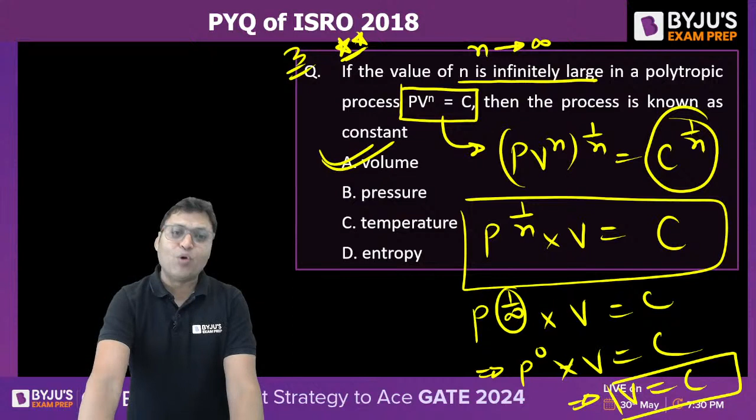So it will be a constant volume process, because P to the power 0 is equal to 1. The process will be constant volume, right? Is this clear to everyone? Please do respond, because your response motivates us to bring more important, helpful sessions for all the mechanical aspirants.

The next question: did Suraj sir discuss this question in heat transfer? This is actually a question from heat transfer. During the charging of a storage battery, the current I is 20 ampere and the voltage is 12.8 volt. The rate of heat transfer from the battery is 16 watt. At what rate is the internal energy increasing?

If we write the basic energy equation in terms of thermal energy transfer, for any system the rate of heat entering per unit time plus the generation of heat per unit time equals Q out plus Q stored. Charging of a storage battery is an example of heat generation, isn't it? Because of current flow, there is generation of thermal energy. Q stored is nothing but the change in internal energy. Since there is no heat entering into the battery, it is heat generated, so Q generation equals Q out plus Q storage.

What is heat generation? Let me write it here. Current into voltage, I into V, is the heat generation, equal to V into I per unit time. That is called Joule's heating, equal to heat leaving the system, 16 watt, plus Q stored.

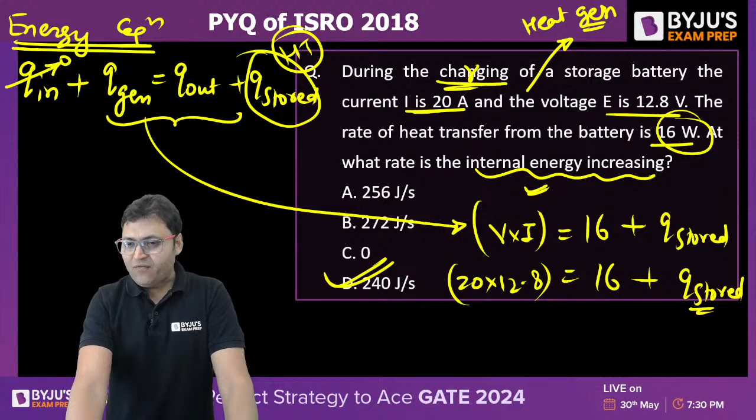Clear? Shall we move to the next one? It is a theoretical question. Everybody can respond, everybody can get me the correct answer for this one.

The compression ratio for diesel engine is close to... it is a compression ignition engine, CI engine, and the compression ratio can be large in case of diesel engine. For an Otto engine, the compression ratio cannot be very large. Are you getting it?

So for a diesel engine, it is around 15 to 20. For a petrol engine, or we can call it SI engine based on Otto cycle, it is around 5 to 8. The petrol engine will be having less compression ratio compared to the diesel engine.

Yes, 6 to 12, 5 to 8, 6 to 12. It is something around 5 to 10, 6 to 12, right? So C will be the answer for this one. Answer is C. Yes, Selja, exam chunk, Rashad, aspirant.

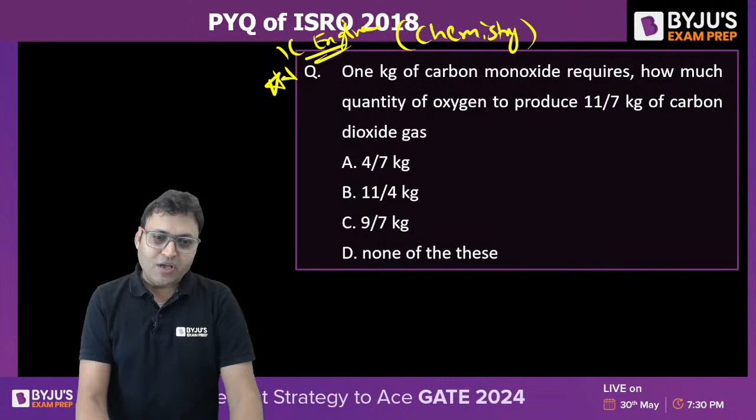Carbon monoxide is CO plus O2 equals CO2. That is how carbon dioxide is produced. But now if we make it a chemically balanced equation, there is one atom for carbon, one for oxygen, so it will be half of O2 because there are two atoms of oxygen. So this will be the balanced equation: CO plus half O2 equals CO2.

So if we write the molecular weight, what is the molecular weight of CO2? 44 kg. What is the molecular weight of half O2? Half of 32, isn't it? CO is 28, isn't it? So 28 kg of carbon monoxide requires 16 kg of oxygen to produce 44 kg of carbon dioxide, isn't it? Do you understand this?

28 kg of carbon monoxide when mixed with 16 kg of oxygen will produce 44 kg of carbon dioxide. So from here we can write: 1 kg of CO combined with 16 by 28 kg of O2 - if we divide by 28 - will produce 44 by 28 kg of CO2, isn't it? Because we are talking about 1 kg of carbon monoxide, right?

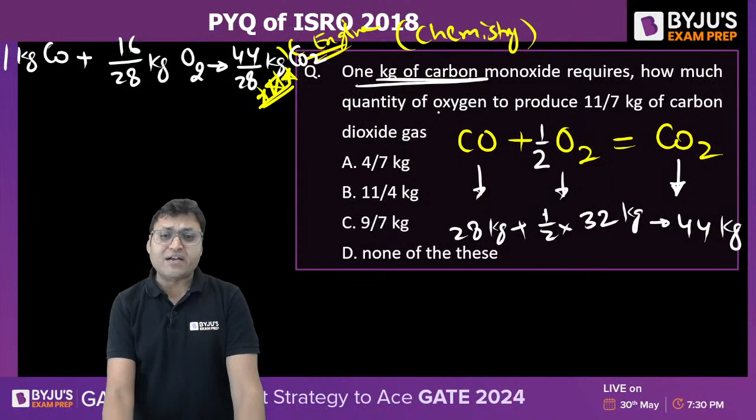Now the question is to find out how much quantity of oxygen is required. So we can say 44 by 28 kg of CO2 is produced by 16 by 28 kg of O2. So if we want to produce 1 kg of CO2, it will be 16 by 28 divided by 44 by 28, so into 28 by 44 kg of O2 will be required, with 28 getting cancelled out.

Now to produce 11 by 7 kg of CO2, we can multiply. The oxygen required will be 16 by 44 into 11 by 7 kg of O2, isn't it? So what is the answer now? 11 by 44, 4 into 16, so it will be 4 by 7 kg of oxygen. Do you understand?

Which data is irrelevant here? That 1 kg of CO.

So for this, option A will be the right answer, right? Option A will be the correct answer. It is a beautiful question, but basic chemistry from the chemical reaction and balanced chemical equation. Is this clear? Now let us move to the next one.

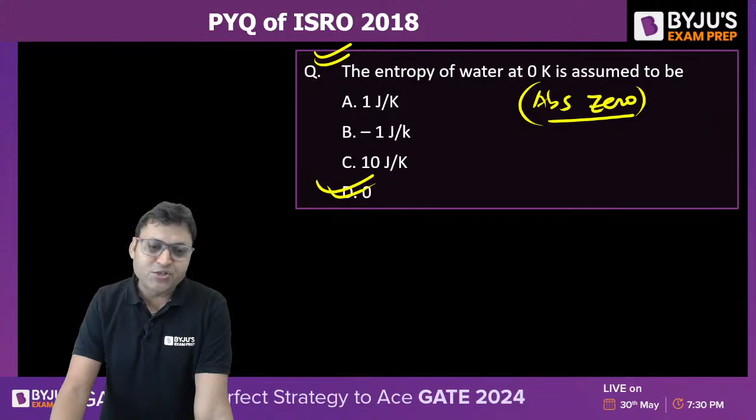So the answer to this question is option D. Next question, again from basic thermodynamics. An expansion process as per the law PV equals constant is known as? This is a constant temperature process. PV equals constant is a rectangular hyperbola. On a PV diagram, the PV equals constant process can be drawn as a rectangular hyperbola, which is asymptotic to the pressure axis as well as to the volume axis.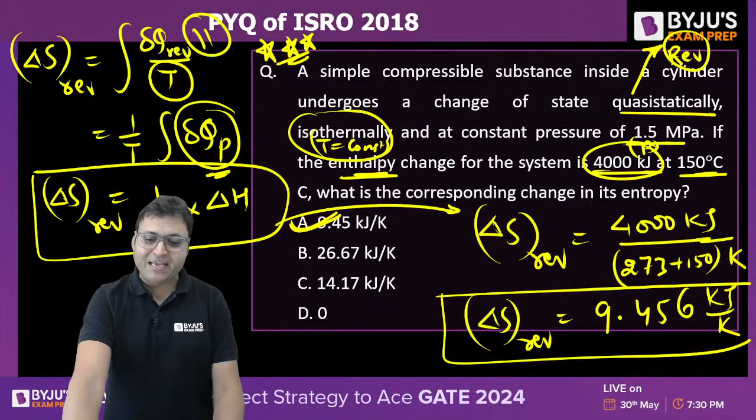Yes, Loga Vignesh, well done, aspirant. Arnab, good. Ento, why are you getting B? Please check your calculation, 9.45. Do not forget to convert the temperature which is given in degrees Celsius to the absolute temperature, that is in Kelvin. It is always the absolute temperature, right? So these are the silly mistakes people commit. So you should take care of the mistakes happening in terms of units or in the conversion.

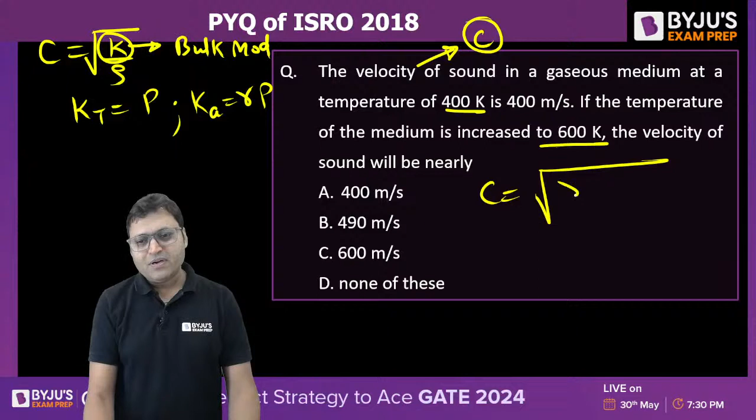Under root K by rho, K can be the isothermal bulk modulus or adiabatic bulk modulus. Isothermal bulk modulus is equal to pressure and the adiabatic bulk modulus is gamma times pressure. So C is equal to under root of gamma P by rho, and P by rho is RT. So C is equal to under root of gamma RT. We need to develop a relation between C and T, so C will be proportional to root T.

So C2 by C1 is equal to under root of T2 by T1. So C2 is equal to C1, that is 400, into under root of T2 by T1. T2 is 600, T1 is 400. Under root of 6 by 4. Your answer should be near to 490 meter per second. Under root of 6 by 4 is under root 3 by 2, under root of 1.5, so it will be greater than 400. It cannot be 400 and it cannot be 600. It is close to 490, close to 500. So B is the right answer for this one.

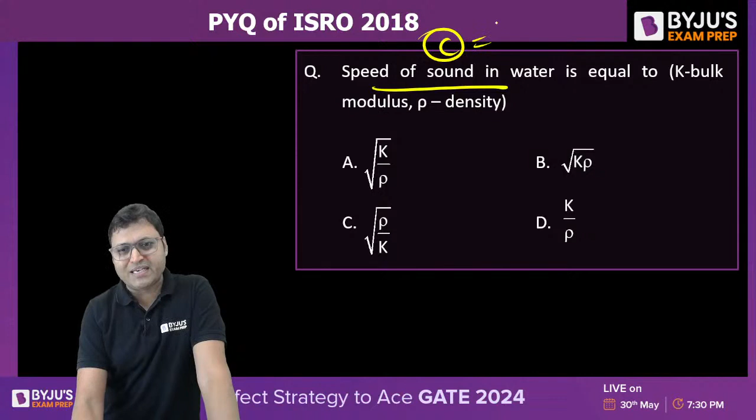It is simple. Speed of sound in water, C. As I have already told you, C is equal to under root of K by rho. K is the bulk modulus, rho is the density. You could have checked with the unit as well, because the unit of C is meter per second. So the one which gives you the unit as meter per second will be the correct answer. So it can only be A.

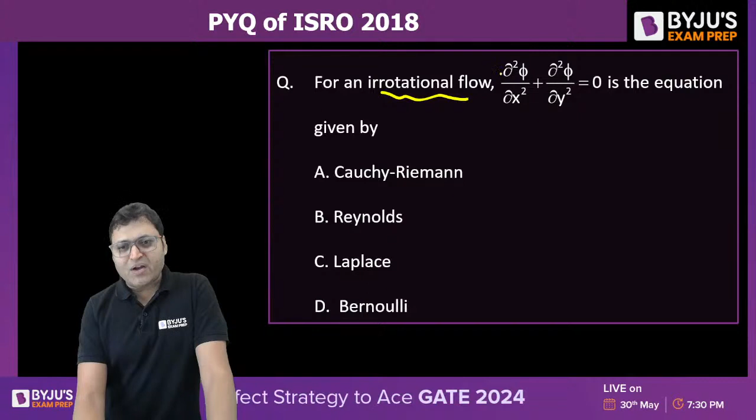Right? You can check the dimension and unit to get your correct answer in these types of question. For an irrotational flow, del square phi by del x square plus del square phi by del y square equal to 0 is the equation given by, that is called the Laplace equation, isn't it? When phi satisfies Laplace equation, del square phi is equal to 0. That is the Laplace equation. So this equation is definitely given by Laplace. Option C is the right answer for this one.

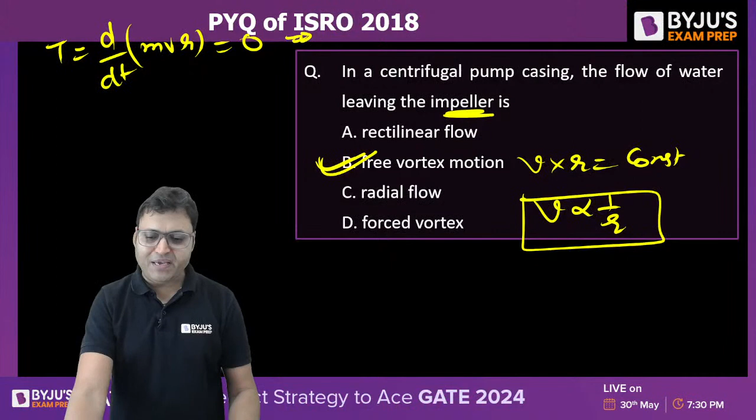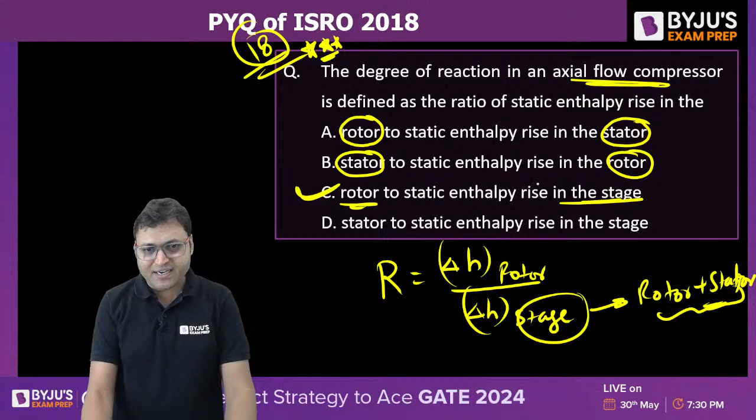So if you see, there are slight changes in each and every option. These types of questions are dangerous actually. If you know the answer, still there are fair chances of committing the mistake. If you see each and every option, you will find slight changes, isn't it? Rotor and the stage, stator and the stage. So the correct answer is option C. It is the ratio of enthalpy change in the rotor to the enthalpy change in a stage.

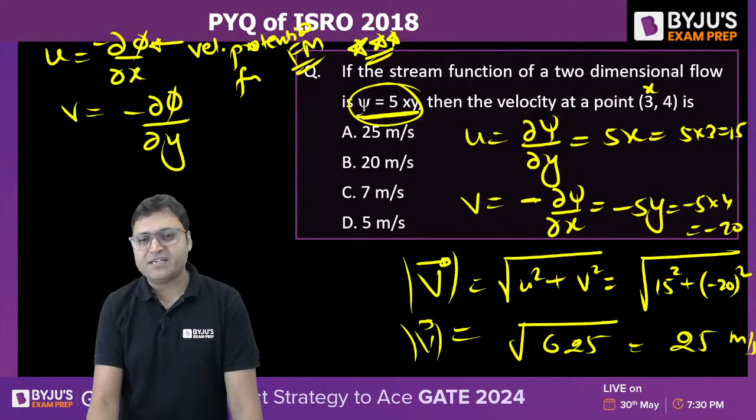It could have been about the velocity potential function. U is equal to minus of del phi by del x. V would have been minus of del phi by del y. For velocity potential function, this is the relation. And for stream function, this is the relation. Psi is the stream function. 25 meter per second will be the answer for this one.

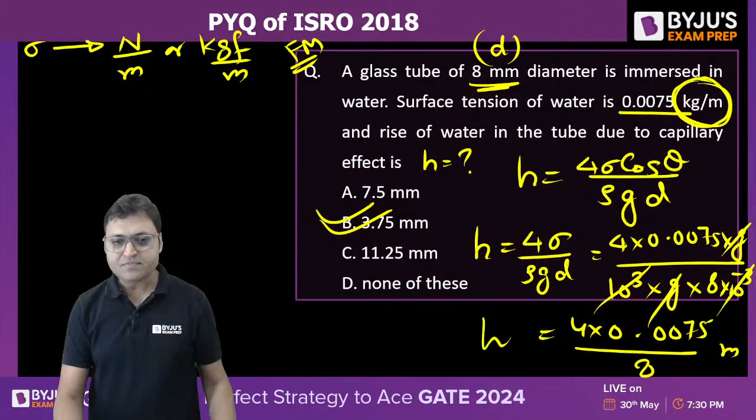4 into sigma, 0.0075 into G, upon density of water 10 to the power 3 into G into diameter 8 into 10 to the power minus 3. 10 to the power 3 and 10 to the power minus 3 get cancelled out, G and G get cancelled out. So your answer should be 4 into 0.0075 upon 8 meter. Can you solve it? It will be 3.75 millimeter. The answer will be option B. That was question number 22.

Quickly, I will take 5 more minutes to complete my part, and then the PYQ, the ISRO 2018 paper, will be completed from our side. Then again we will bring previous year questions to solve in front of you, and we will bring more sessions around ISRO 2023 because we want you to grab this opportunity which comes once in a while. Yes, we need to develop a relation between N and H.

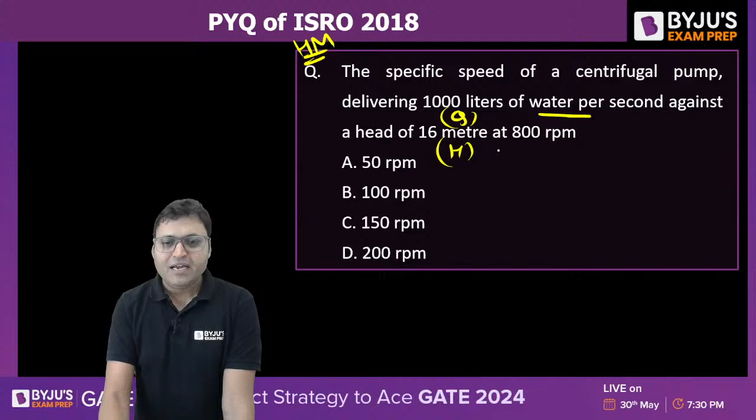The specific speed of a centrifugal pump delivering this much water per second against a head of 16 meter at 800 RPM is. It is about a pump. So what is the specific speed of a centrifugal pump? N root Q upon H to the power 3 by 4. Put the values. N is 800 RPM. Q is 1000 liter, convert it into meter cube, that is 1000 into 10 to the power minus 3. Upon H, that is 16 to the power 3 by 4. This will become 1, so it will be 800 upon 8. 16 to the power 3 by 4 is 8. So it will be 100. Specific speed for the pump is 100.

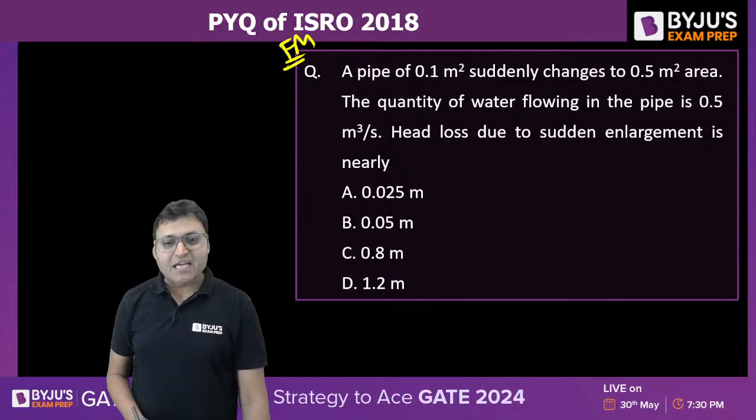The next question is again from fluid mechanics. The minor losses, the loss due to sudden enlargement.

He is a very focused aspirant. He is so focused, so concentrated that nobody can distract him. That is the concentration level everyone should develop. Whatever is going around you does not bother you.

So for the sudden enlargement, what is the formula? V1 minus V2 whole square by 2g, isn't it? Can we take V1 common? 1 minus V2 by V1 whole square. Can we call V2 by V1 as A1 by A2? V1 square by 2g into 1 minus A1 by A2 whole square, isn't it?

A pipe of 0.1 meter square, this is A1, area is given because the unit is meter square, suddenly enlarges to 0.5, this is A2. The quantity of water flowing in the pipe is 0.5 meter cube per second, that is the discharge. So can we call V1 Q by A1? Q is 0.5, A1 is 0.1, so V1 is 5 meter per second. Put the values. HLE, the loss due to sudden expansion, is 5 square upon 2g, 2 into 10, into 1 minus A1 0.1 upon A2 0.5 whole square.

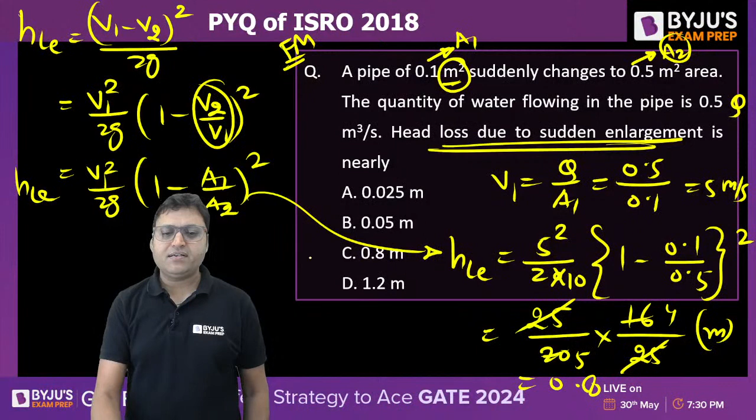Square. So it will be 25 upon 20 into 1 minus 5 by 1... sorry, it is A1 by A2. So 1 minus 1 by 5 is 4 by 5, which gives 16 by 25 meter. The 25 gets cancelled out, so 4 by 5 or 0.8 meter will be the answer. Option C is the correct answer.

This is simple. What is the answer to this one? The hydraulic diameter - whenever the pipe is non-circular, what will be the hydraulic diameter? To convert the non-circular into a circular cross section, we go for hydraulic diameter. And what is hydraulic diameter? That is 4 into flow area by wetted perimeter, 4A by P. So this will be the area, this is the flow, so area will be A into B. What is the wetted perimeter?

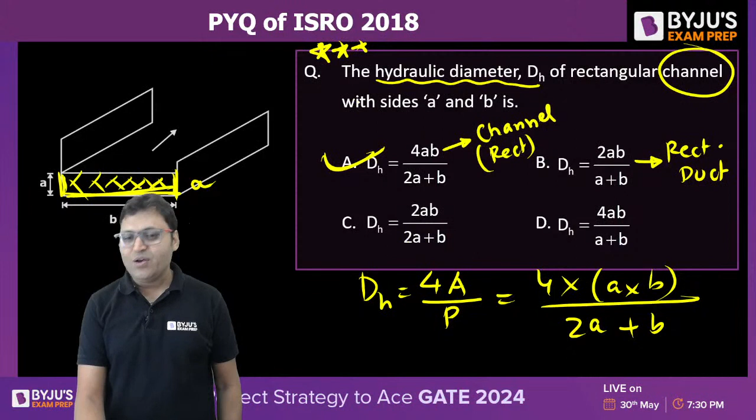Yes, Arnav, you are in sync, but your answer is incorrect. B is not the right answer for this one. Do you get it? If it would have been a rectangular duct, then the perimeter would have been A plus B plus A plus B. But because it is a channel only, a rectangular channel only, the perimeter will be A plus B plus A. So option A will be the correct answer for this question. This is how you should avoid silly mistakes. There are chances the question will look simple, but do not be overconfident in ISRO examination.

So that is all from my side, guys. I hope you enjoyed the session, and thank you very much for being there from 11 a.m. till 1:30, so around 2.5 hours we were discussing the ISRO 2018 paper. So how many of you are there who joined the session from the beginning?